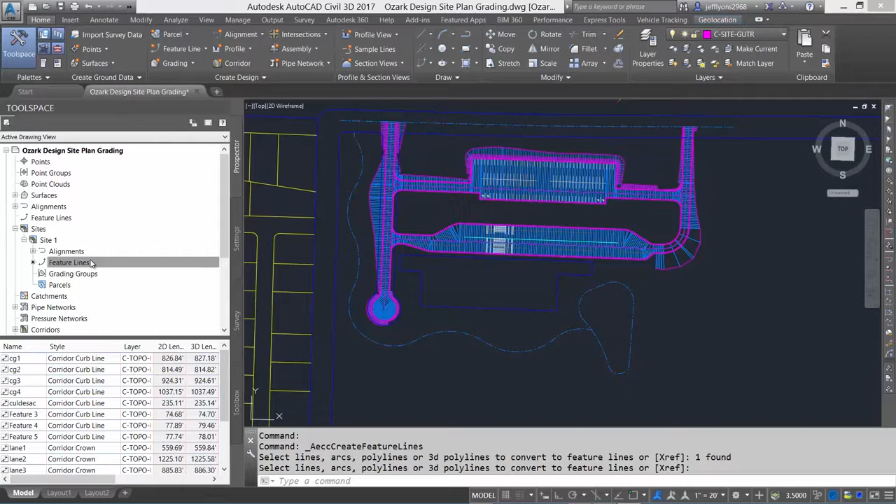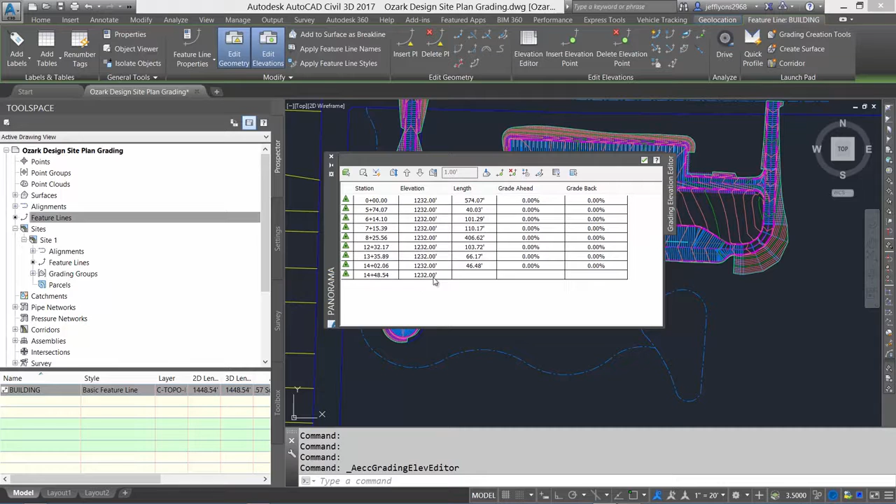One of the new features of AutoCAD Civil 3D 2017 is the ability to create a siteless feature line. Consider a siteless feature line using the building pad polygon. Since the feature line has an elevation based on the building pad, elevations don't need to be assigned, and the elevation of 1232 has already been assigned to that building pad.

Add another feature line, again without the site, and assign a style. This feature line will be atop a bank or some kind of daylighting feature that should not necessarily be connected to the building. In this case, the building feature line can be picked and it won't affect the elevations of that building. It can be an independent feature line without having a dynamic connection.

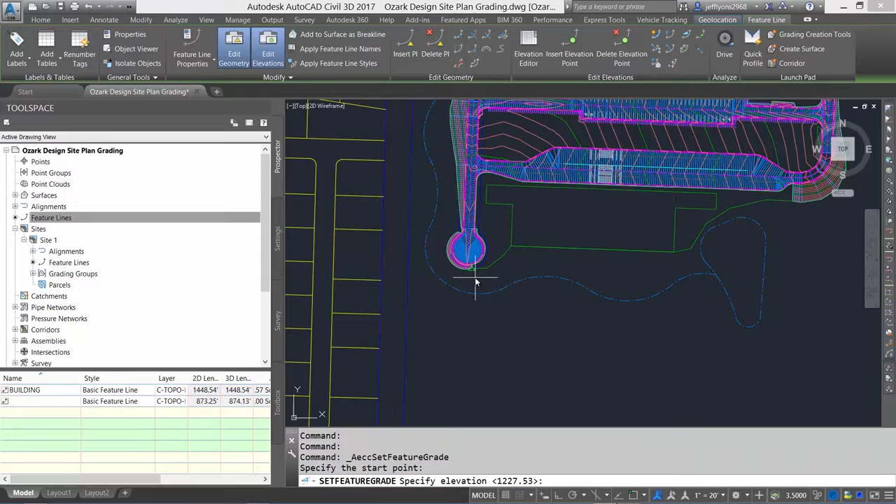Check the elevations of this new siteless feature line. The elevation varies based on our slope from point A to point B. Check back to the building feature line, and the elevations have not changed. Even though they're both siteless, they don't interact with each other.

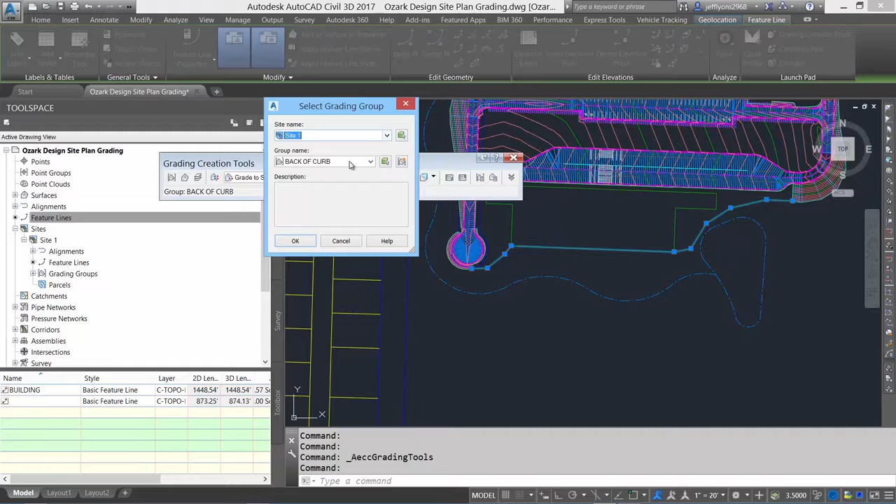Add a grading object to the daylighting feature line with a standard procedure to pick the grading creation tools, and create a grading group under Site 1. Call the grading group Daylight, and it will create the surface. You can now assign the surface for daylighting, check the criteria, and assign the siteless feature line to the grading group. The feature line is no longer available to this particular site grading group.

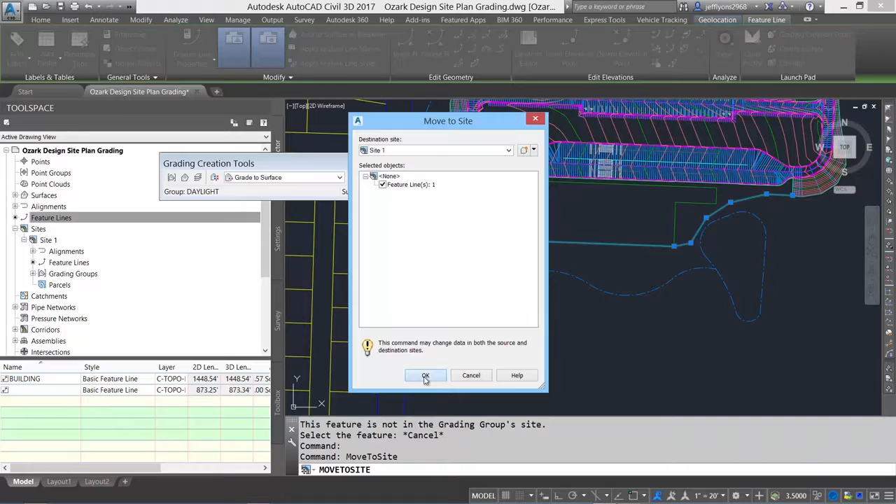In order to actually make a grading object from this, the siteless feature line will need to be moved to the grading group site. Once it's in the site, you can check for it in the feature lines list, then use it in your grading group. If you want to create a grading group from siteless feature lines, you just have to move it to a specific site first. That procedure completes our grading object for this site.